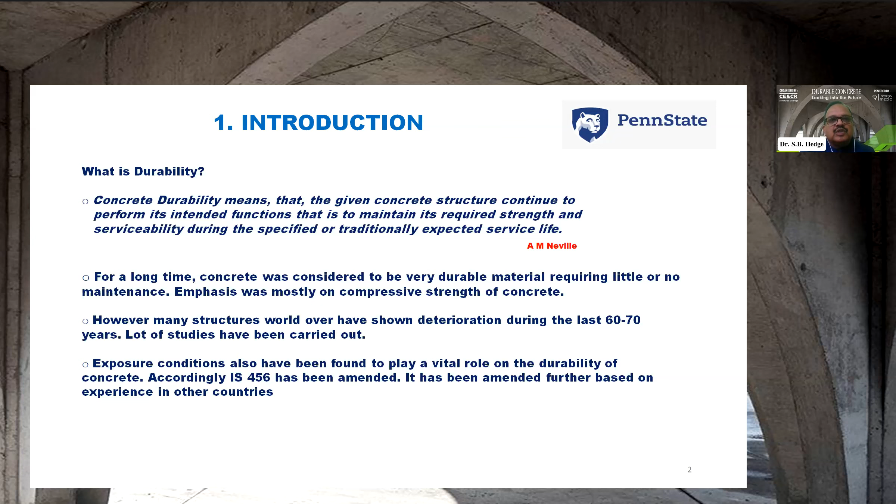I will start with some facts about durability which you may already be aware of, but for the sake of the attendees, I will just go through these slides, which are very basic in nature.

So let us consider these factors affecting the durability of concrete. The main components are the materials used in the manufacture of concrete, the method of manufacture, placing, compacting, curing, environmental conditions, loading patterns, various pollutants like carbon dioxide, and chemicals that have pervaded the environment.

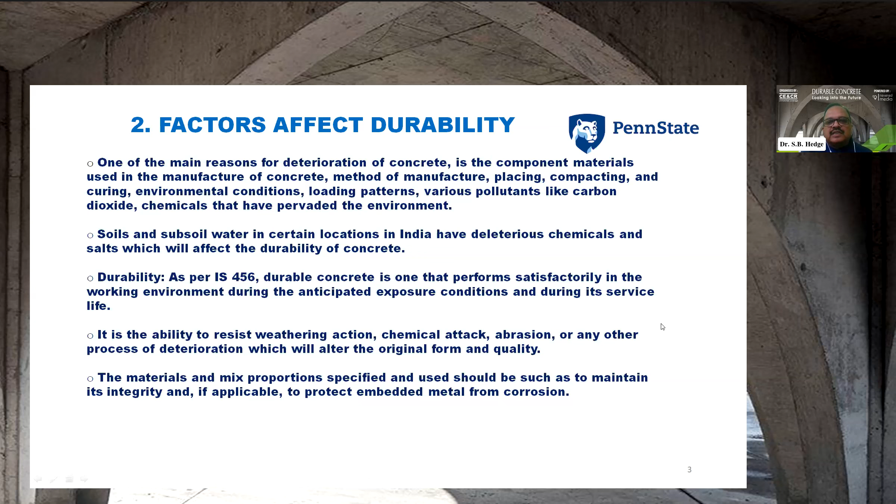So according to IS 456, durable concrete is one that performs satisfactorily in the working environment during the anticipated exposure conditions and during its service life.

Also, durability is affected by things like ingress of water, oxygen content, carbon dioxide, chloride, sulfate, and other potentially deleterious substances.

The impermeability is greatly governed because this is what is required. If the concrete is not impermeable, if it is pervious, then the deleterious components in the form of solutions of fluids enter into the concrete structure, and it will destroy the concrete.

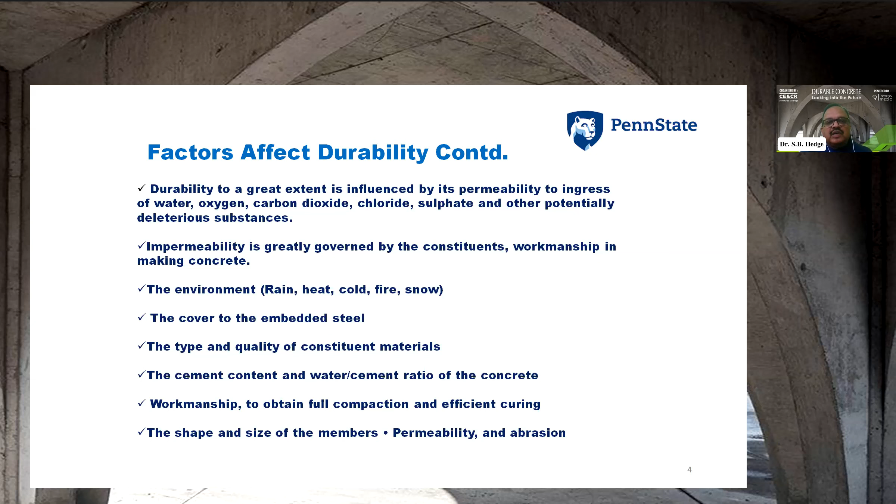Therefore, the environment like rain, heat, cold, fire, snow, the cover to the embedded steel, type and quality of constituent material, cement content - all are very important factors affecting durability.

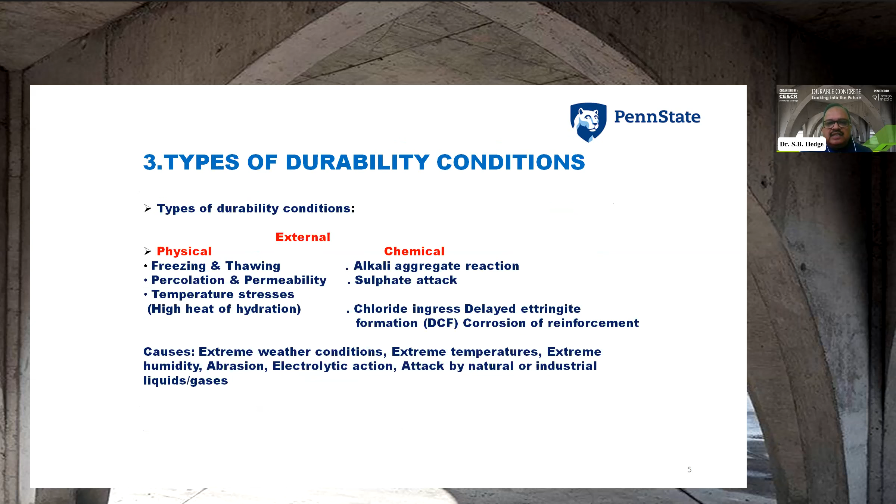If you see the different agents hampering the durability of concrete, there are two things: one is external and the other is internal. Externally, there are physical things like freezing and thawing, percolation and permeability, and chemical factors like alkali aggregate reaction, sulfate attack, chloride ingress, delayed ettringite formation, corrosion of reinforcement, etc.

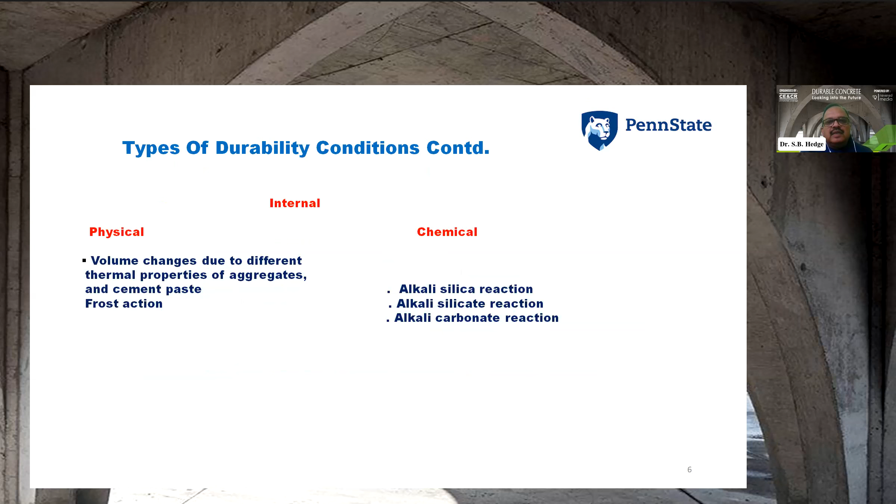Also, certain volume changes are happening. Physically, this is due to different thermal properties of aggregates and cement paste, frost action, etc. The volume expansion exerts a lot of pressure on the structure of the concrete, and it will start showing cracks. And chemically, as I mentioned, there's alkali silicate reaction, alkali carbonate reaction, etc.

If you see the environmental conditions responsible for concrete durability, there are 5 things - 5 environmental conditions have been mentioned: mild, moderate, severe, very severe, and extreme.

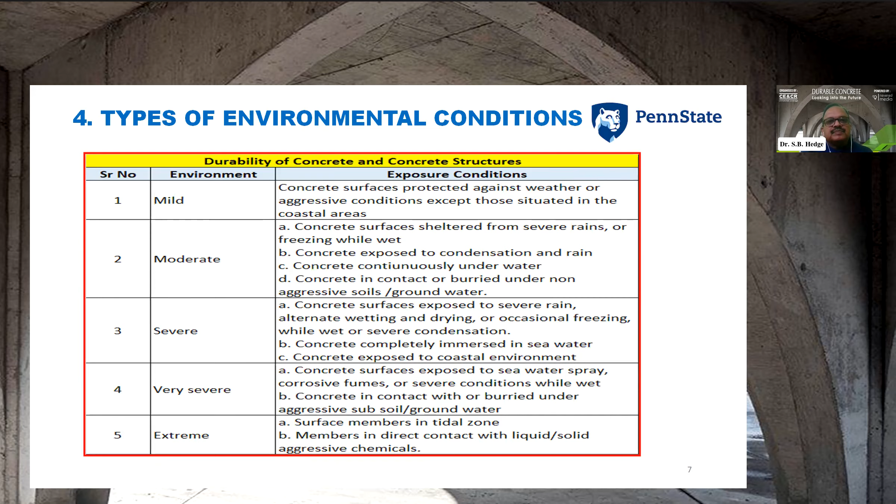When talking about general design requirements, the shape or design details shall be such that proper drainage is provided, avoiding standing pools of water, with junctions of members properly designed. Second is minimizing cracks that transmit water. Third is proper compaction and curing. Fourth, concrete is prone to deterioration due to climatic and chemical attack, especially in sections under hydrostatic pressure from one side, and partially immersed sections at corners and edges of elements. So these are certain design things to be considered.

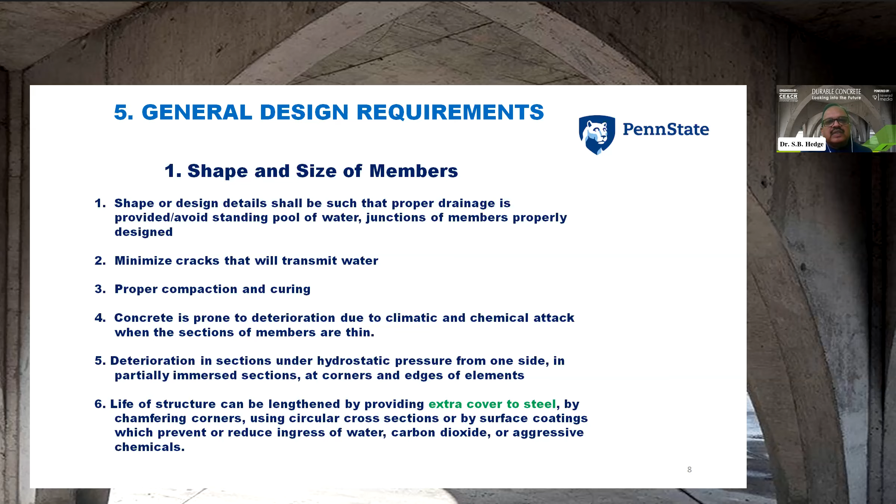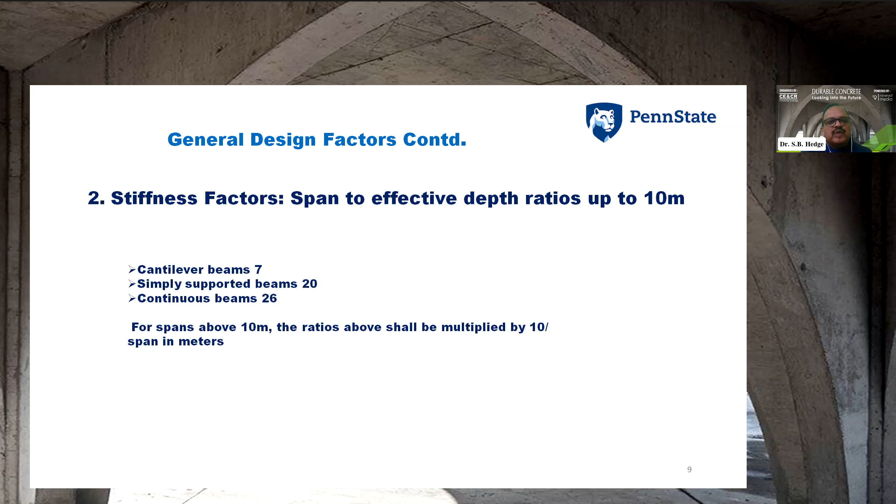Second is the stiffness factors. The span to effective depth ratios up to 10 meters: for example, cantilever beam 7, simply supported beams 20, continuous beam 26. For spans above 10 meters, the ratios above shall be multiplied by 10 divided by span in meters.

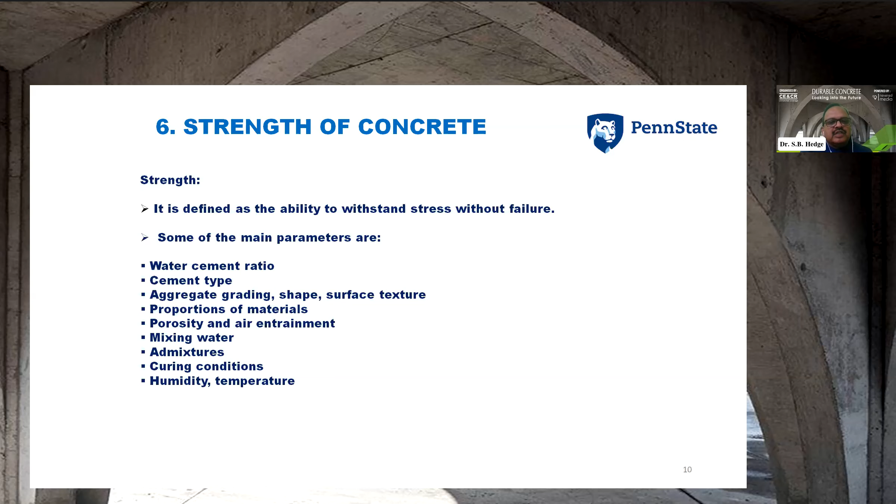What are all the factors responsible for the strength of concrete? The major things, as you are aware, water cement ratio plays a very important role. Then comes cement type, aggregate grading, shape, surface texture, proportions of materials, porosity, air entrainment, mixing water, admixtures, curing conditions, humidity, temperature - all will have a direct effect on the strength of concrete.

To give some idea about the strength of concrete, I have taken the example of M25 concrete. The permissible stresses are mentioned here: compressive stress is 6 N per mm square direct. Various permissible stresses have been mentioned: tensile stress, flexural stress, shear stress, bond stress. The strength of concrete, the grade of concrete, and the bond stress in N per mm square - everything has been mentioned. I don't want to read each and everything. I have given from M20 and M40 and above. You can see the bond stress in N per mm square.

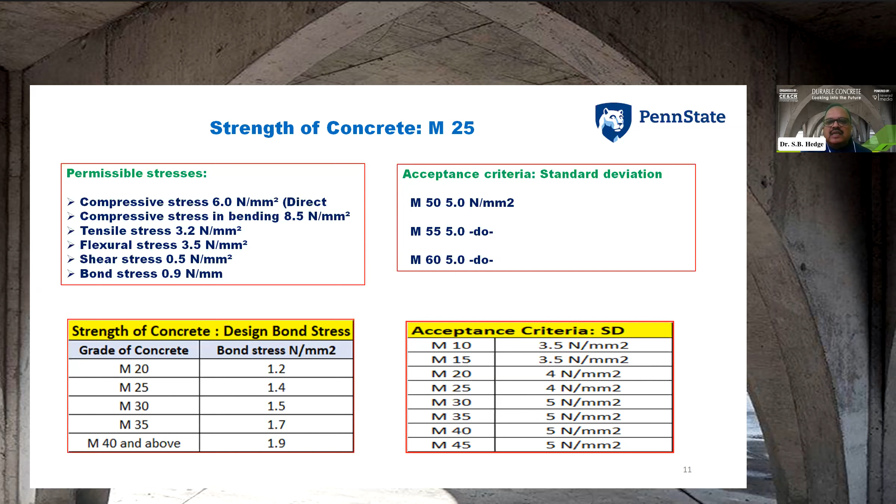And the acceptance criteria: standard deviation for M50 is 5 N mm square, M55 is 5 N mm square, and M60 is 5. The acceptance criteria as shown from M10 to M45. This is the acceptance criteria of standard deviation of the strength of concrete. You can see from the slide.

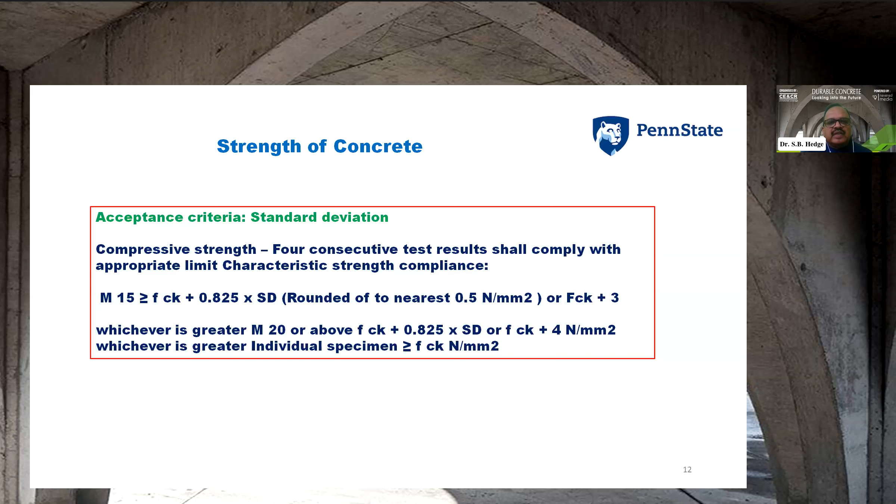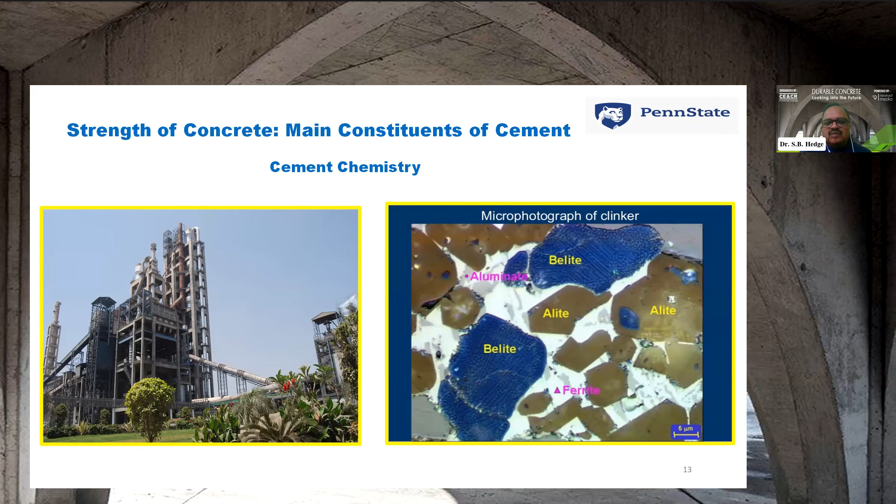The other photograph is showing the micro photograph of a clinker, a polished sample of a clinker, which shows the alite, belite, aluminate and ferrite. These four phases are responsible for the effects in the cement.

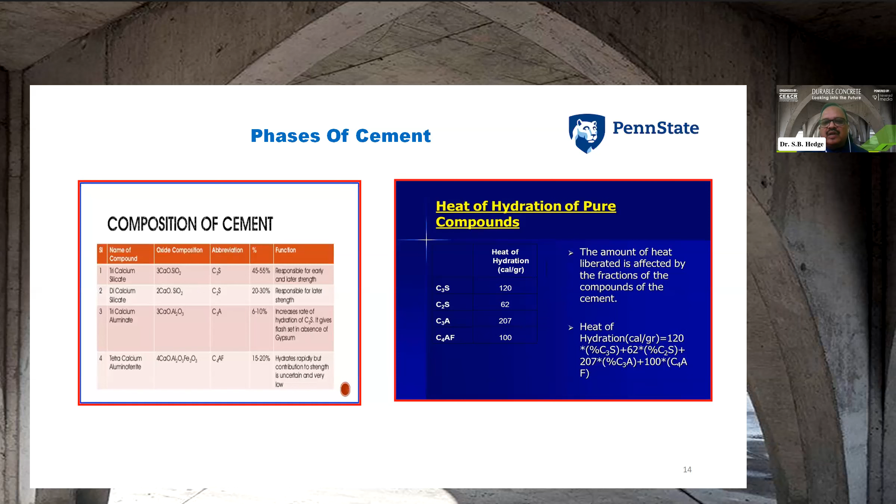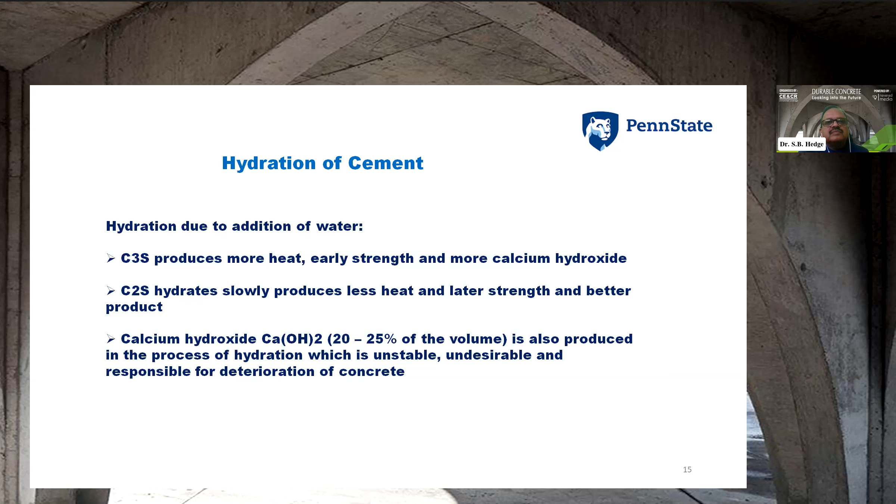If you add water into the cement, it will start hydrating, and C3S will react with water, forming CSH gel. Similarly C2S and C3A also react, as I'll show in the next slide. Calcium hydroxide also comes out of the hydration process, but it is very unstable and undesirable - more calcium hydroxide is just like high blood sugar compared to the human body, so for cement, high calcium hydroxide is just like diabetes. The hydration reactions shown: C3A reacts with water giving ettringite, and C3A once again reacts with what is leftover, forming monosulfoaluminate, while C3S and C2S give CSH gel, which is responsible for strength generation. This is the reaction of hydration.

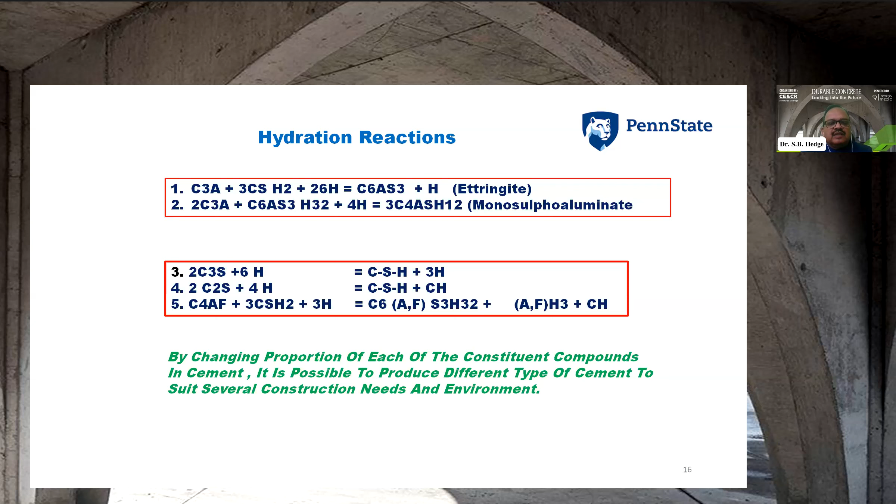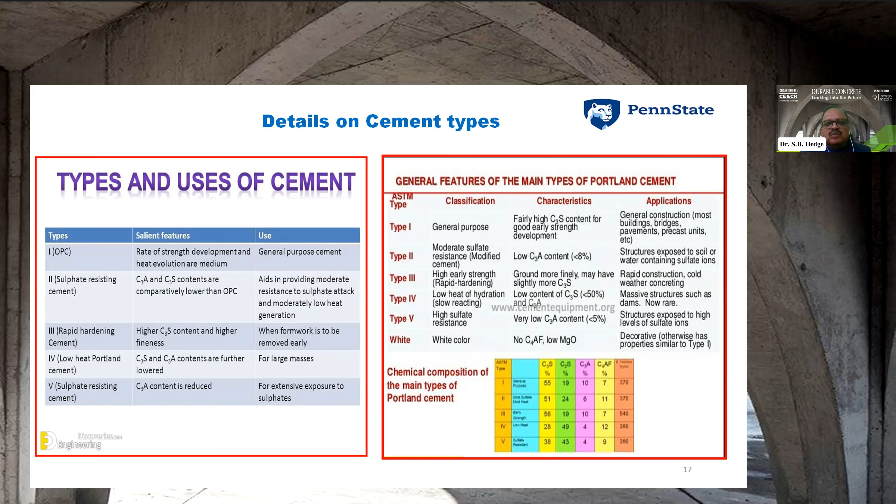The codal provisions, if you look at it, the standard codes of all the construction practices are SP62, CPWD standard specifications, IS 456, NBC 2005. These codals are available for reference.

And if you see the next slide, the minimum cement content and maximum water cement ratio for RCC are shown for 4 different environmental conditions: mild, moderate, severe, extreme. What should be the cement content and water cement ratio for each grade of concrete, everything has been shown.

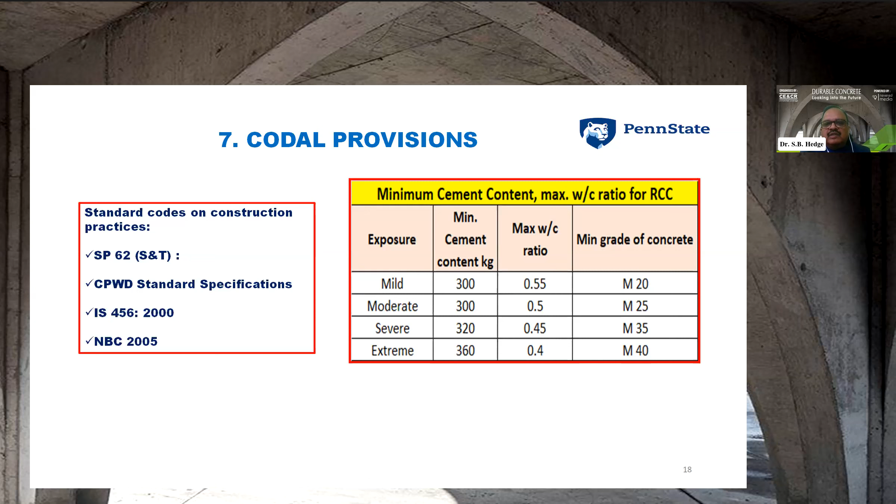And the type of cement, which I mentioned, in India I think there is only OPC IS 269 available, and then PPC IS 1489, sulfate resisting cement, rapid hardening cement, even PSC, everything is available. But there is no such category like 43, 33 or 53 that has been clubbed into IS 269.

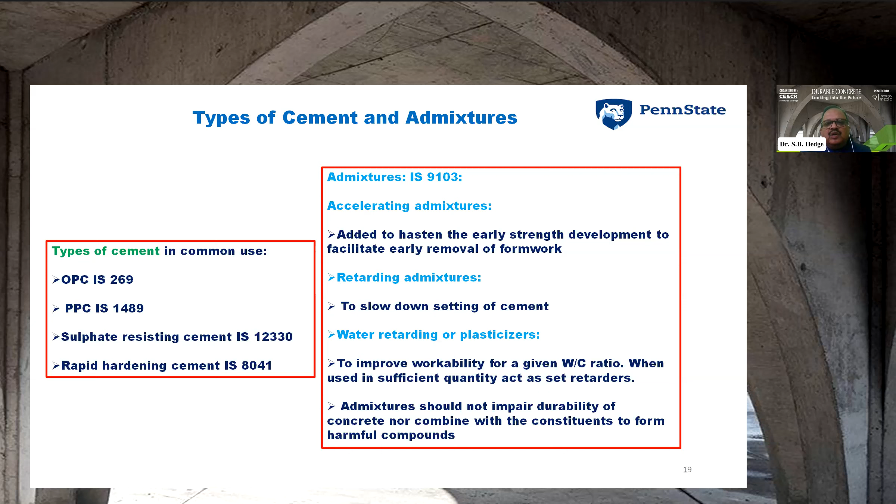And this is the specification for admixtures. You can see the different types of admixtures for retardation and for reduction of water. Depending upon the water reduction, it is classed as plasticizers and super plasticizers.

And also among the admixtures, air entraining admixtures or air entraining agents are coming, which is a very important thing. These improve the durability, water tightness, and workability, etc.

So it's very important. And if you see the other table, the slump required for different placing conditions - blinding concrete, shallow sections, mass concreting, heavy reinforcement, slipform work, etc. - and the degree of workability is also mentioned, along with what should be the slump and compacting factor.

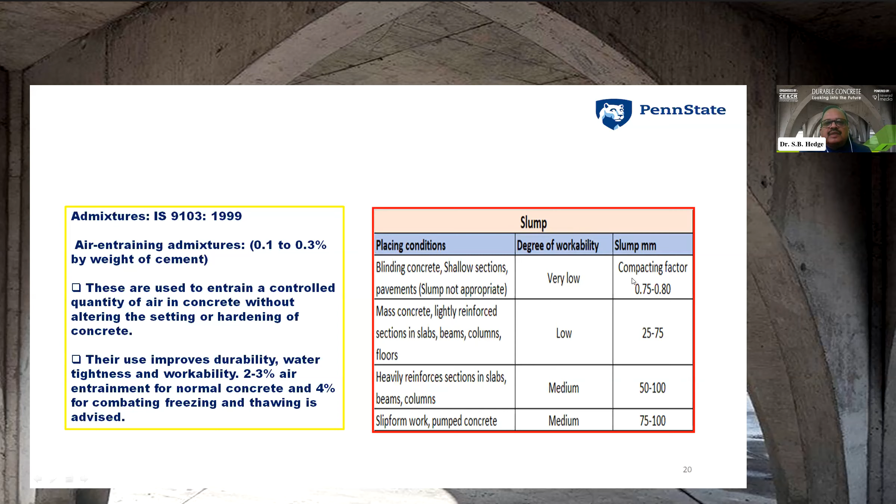Second, we will go to chemical action on concrete. If you look at this table, there are different concentrations of SO3 shown at 5 different situations, and the required minimum cement content has been mentioned with maximum water cement ratio, and what type of cement is to be used has also been tabulated, you can see by yourself.

Another table talks about the chloride content, the type of concrete, and the maximum chloride per kg per cubic meter shown here. Similarly, for water used in concrete - organic, inorganic sulfates and chlorides for PCC - the permissible limit as per IS has been mentioned for your reference, the permissible limit of water.

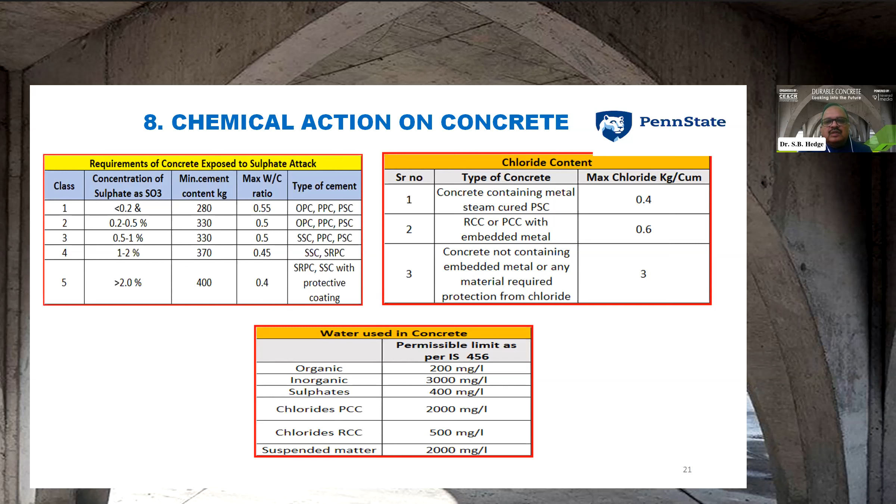The next important thing is that durability is also governed by soils and water, because a majority of soils contain sulfates and other deleterious components which come directly in contact with the concrete and are responsible for sulfate attack, which goes into the structure of the concrete, and the sulfate attack begins.

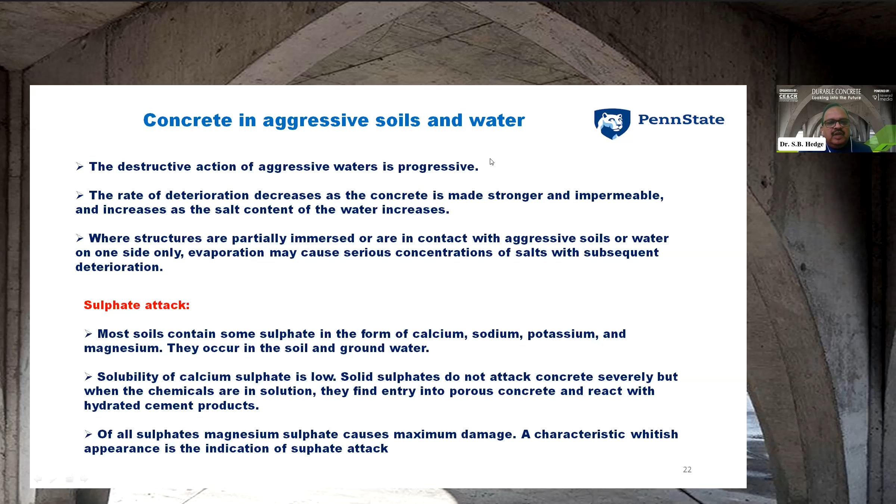And magnesium sulfate is also very, very important for durability of concrete, just like sulfate attack. The magnesium sulfate I mentioned reacts not only with calcium hydroxide and hydrated calcium aluminates, but also decomposes hydrated calcium silicates completely. You can see white patches if it is attacked by magnesium sulfates.

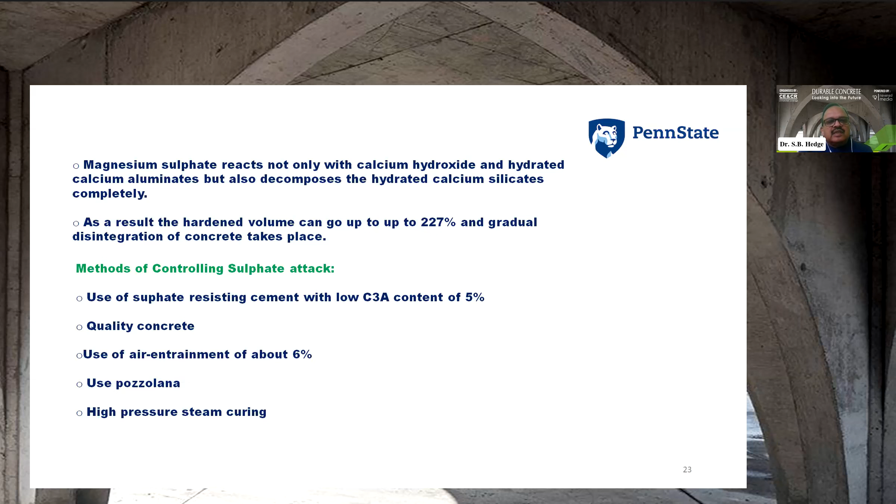So how to control this sulfate attack? The use of sulfate resisting cement with low C3A content is one option. Then the quality of concrete should be good. You have to use air entraining agents and use pozzolanic materials or cementitious materials. These are certain options available for making it durable.

The structure, because the water also contains a lot of TDS. If TDS is very high, once the water is evaporated, there will be an incrustation of salts, which is responsible for the disintegration or durability issues of the concrete in that region.

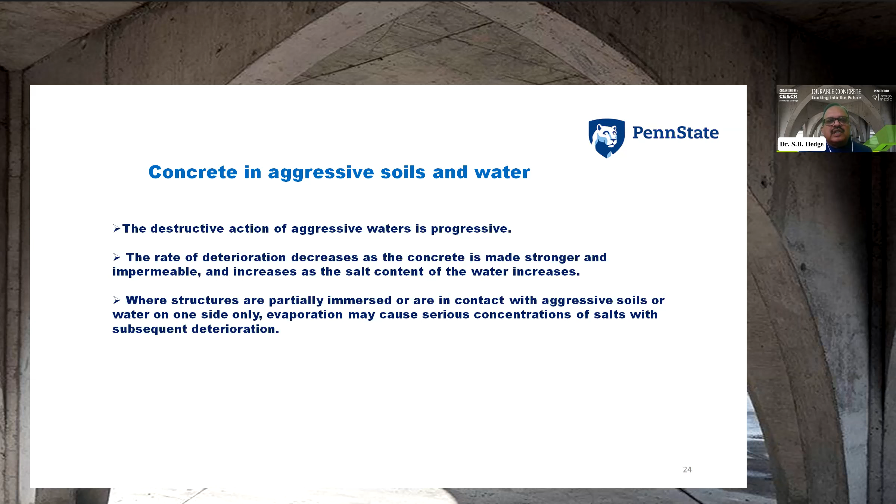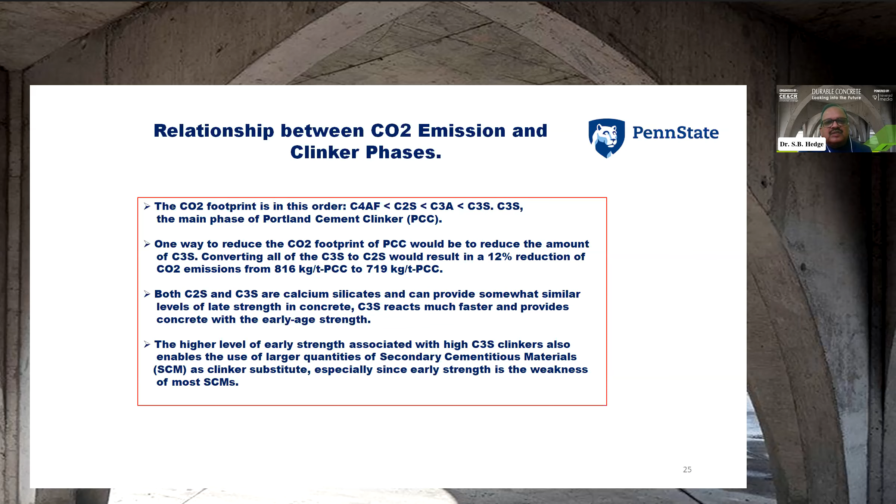So now we are talking about the durability to enhance concrete sustainability, because this is the route, this is how we have to go. It should go hand in hand, because we cannot do the work only on sustainability or only on durability, and both the things are to be looked into—we cannot do it in isolation. As you all know, the sustainability of concrete buildings and infrastructure must be considered, both in terms of its benefit to society and the environment, and the impact associated with its use in construction.

As you are aware, concrete is a very cheap material, and therefore it has gained a lot of importance in construction. Similarly, the durability performance of construction materials is important. Concrete is often considered to be inherently durable due to chemical and physical resistance to various environments and dimensional stability.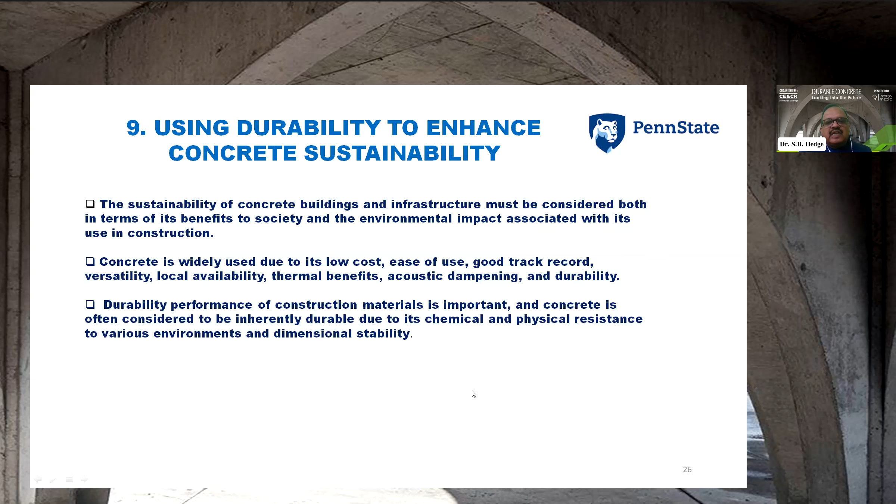And of late, cement and concrete making are also incorporating a lot of waste material into the system, to talk about sustainability initiatives or the circular concept, circular economy. Waste utilization, as I mentioned, has started now—for example, waste oils and other combustible materials.

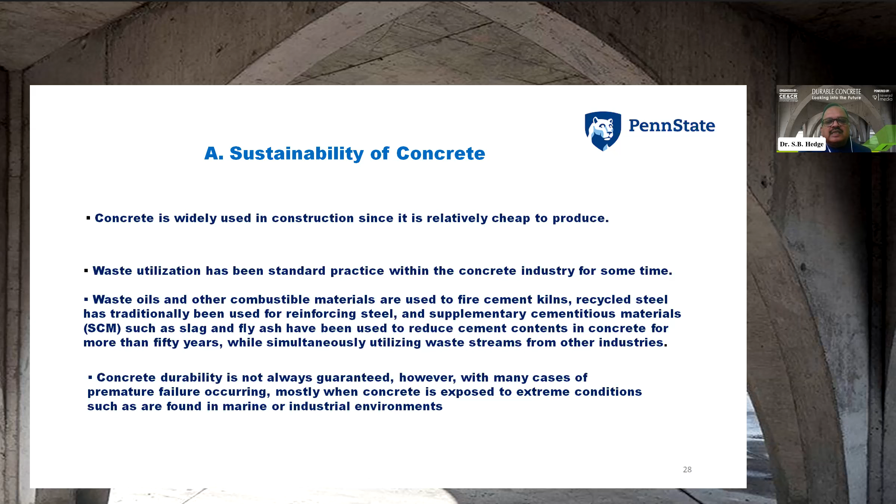We started because cement and concrete are going hand in hand, since cement is not the end product—the end product is the concrete. So what is required is how much CO2 is coming out from cement making or concrete, that is important. Therefore, it is very, very important to use sustainability initiatives in cement plants. Cement plants are using a lot of various alternate fuels—wastes from the municipality, plastics, tires, etc. Similarly, these things have started in concrete making also, which I will discuss in the next slide.

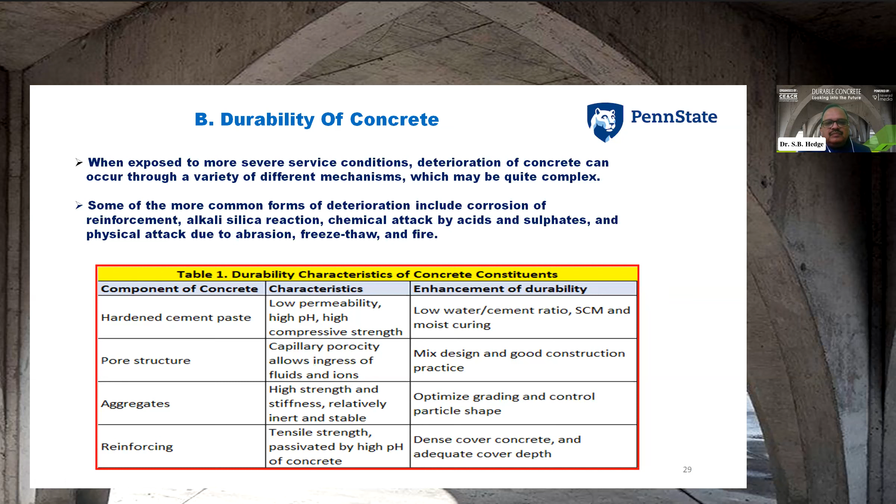So this particular slide shows how to mitigate concrete deterioration in order to attain a sustainable approach. Various deterioration issues occur—for example, corrosion of rebar, alkali silica reaction, physical attack and abrasion, sewer pipe corrosion, etc.

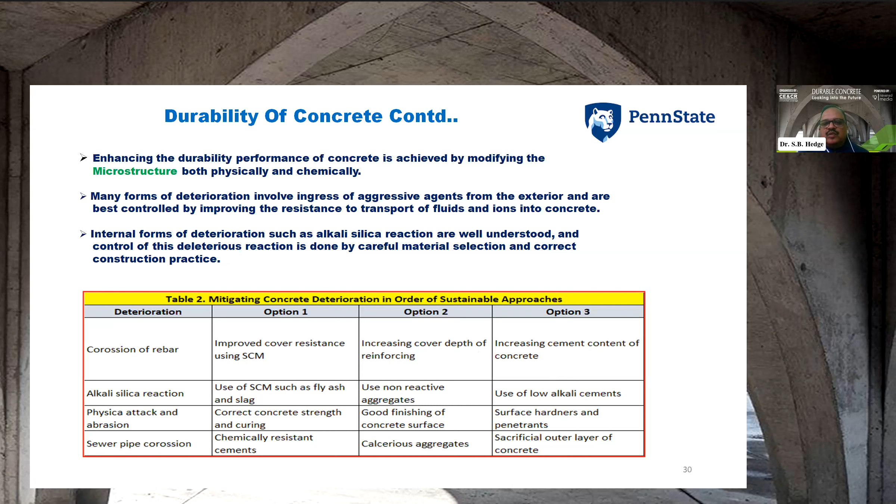The three options which I mention here: improved cover resistance using SCM such as fly ash, correct concrete strength and curing. Option 2: increasing cover depth of reinforcing, use of non-reactive aggregates, good finishing of concrete surface. Option 3: increasing cement content of concrete, use of low alkali cements, surface hardeners and penetrants, etc.

So now we are talking about improved service life. As you are all aware, buildings or structures have been designed for 30 to 50 years. If you can double the service life of structures, maybe to 100 to 150 years, it does not require a significant increase in construction resources. In many cases, the extra requirement involves only a slight adjustment in the concrete resistance or cover depth to the embedded reinforcement. By this, we can improve the service life of the concrete, of the structure.

The cover concrete that surrounds the reinforcing steel provides protection from environmental agents such as moisture and salt that cause corrosion. One example I've given is a bridge in New Zealand, and the table shows the PC percentage mentioned from 100 to 50%, then SCM percentage, then 40mm cover and 60mm cover. You can see the effect of this.

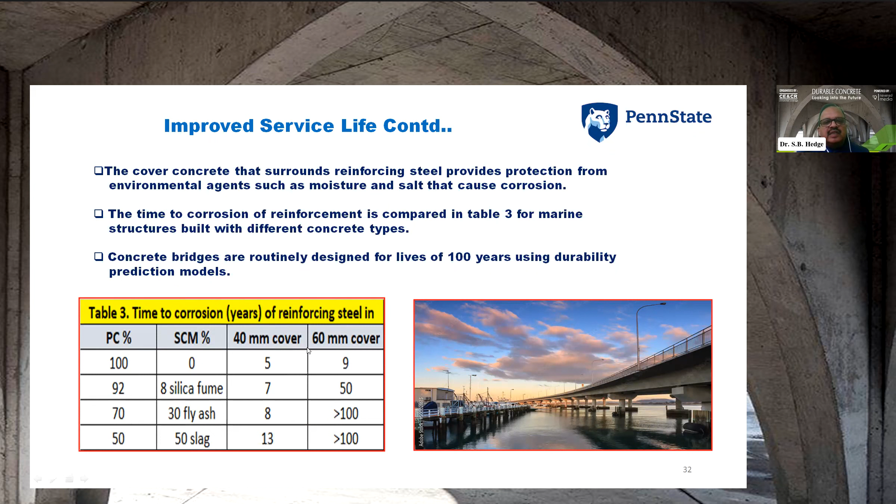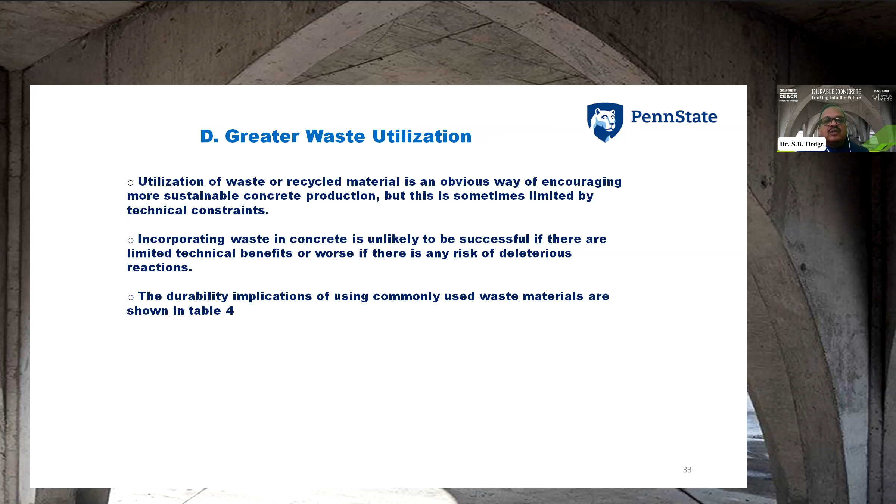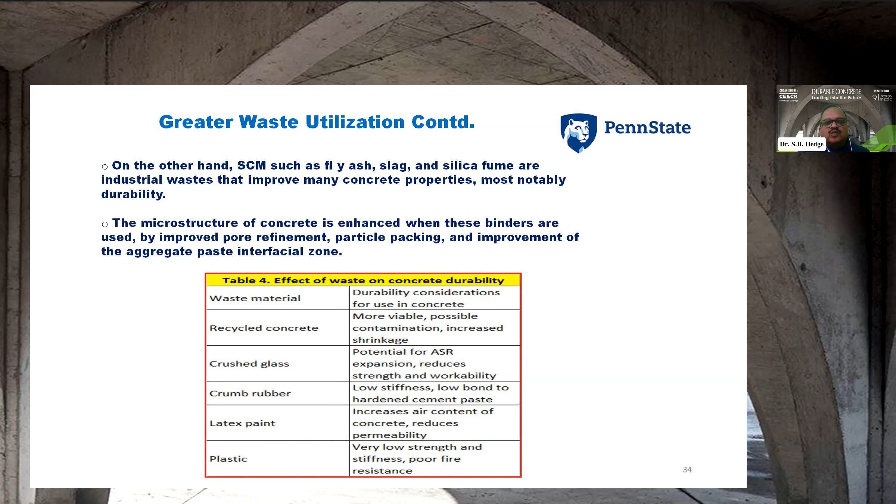Then there is greater utilization of wastes in concrete, which I already mentioned. Various materials have been used—waste materials like recycled concrete, crushed glass, crumb rubber, latex paint, etc. But you can see the effect of that: durability considerations, more viable, possible contamination, increased shrinkage. So durability may increase or it may be hampered also by using these waste materials—we have to keep that in mind and make a sort of optimization of what should be the level of addition of these materials, so that durability should not be hampered. At the same time, these materials are also being used, so we have to have a balance of that.

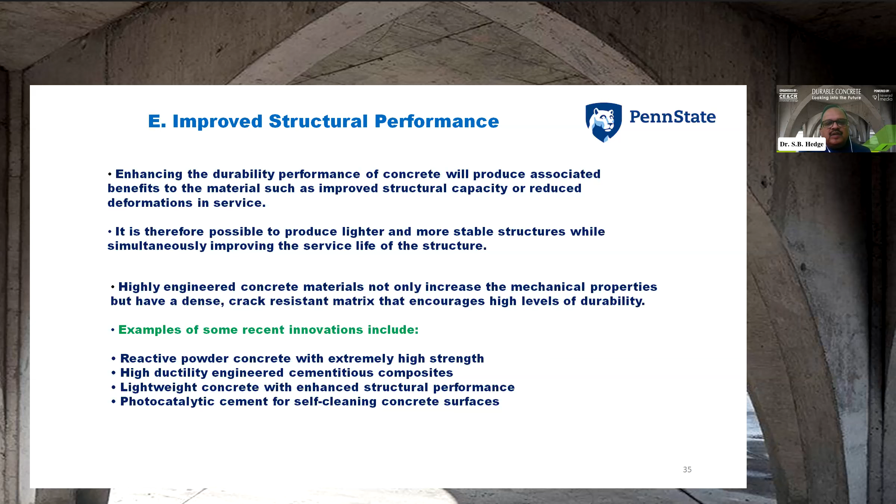So the next point is improved structural performance, which is obviously a very important thing to improve the service life of the concrete, which I already mentioned. Some examples of recent innovation which I included: reactive powder concrete with extremely high strength, high ductility engineered cementitious composites, lightweight concrete with enhanced structural performance, photocatalytic cement for self-cleaning concrete surfaces, etc.

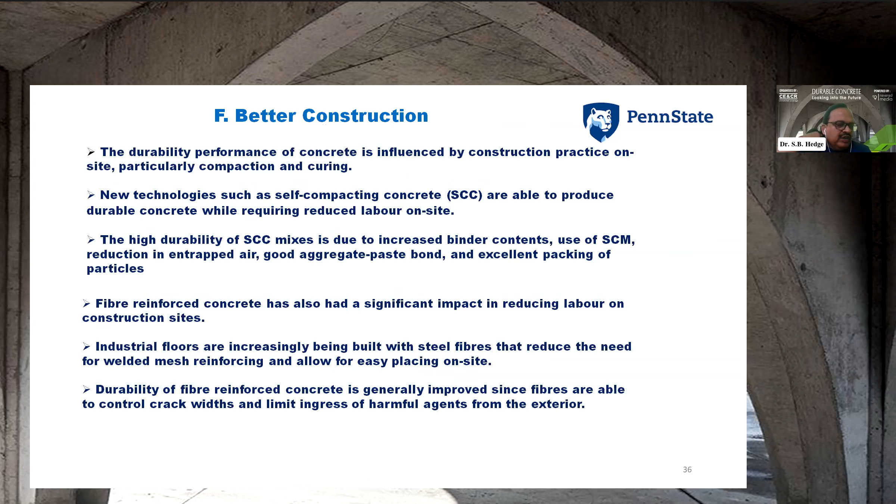So for better construction, I think now new types of concrete have come out, like self-compacting concrete, fiber reinforced concrete, etc. These have come into the picture, or we can say some special concretes.

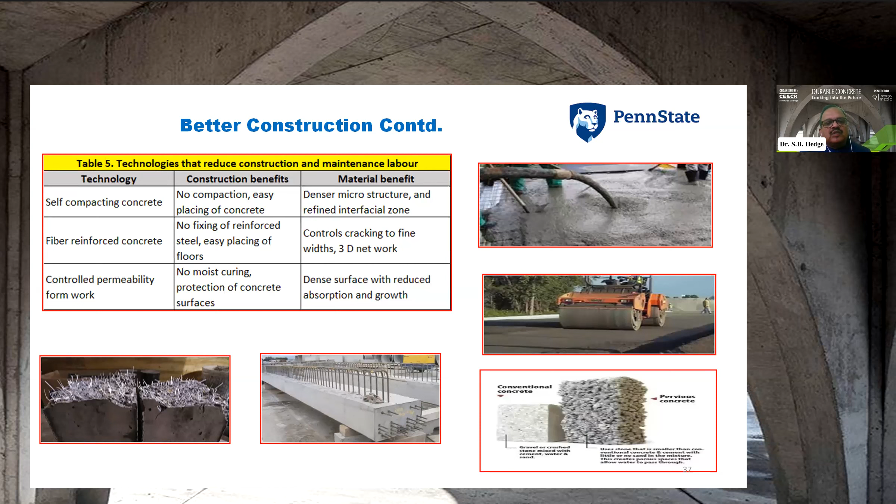In this table, you can see self-compacting concrete, fiber reinforced concrete, controlled permeability formwork, the construction benefits, material benefits, and the advantages of using this type of concrete have all been mentioned.

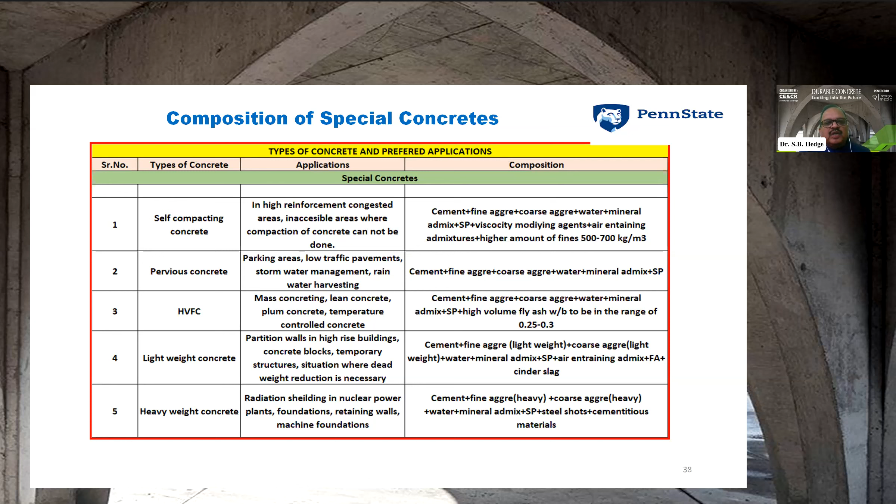This particular table shows the various new generation concretes, or special concretes. You can see where it is being used, the composition of this concrete, the ingredients, etc., have been detailed. I have tabulated around 10 special concretes that you can see from this table.

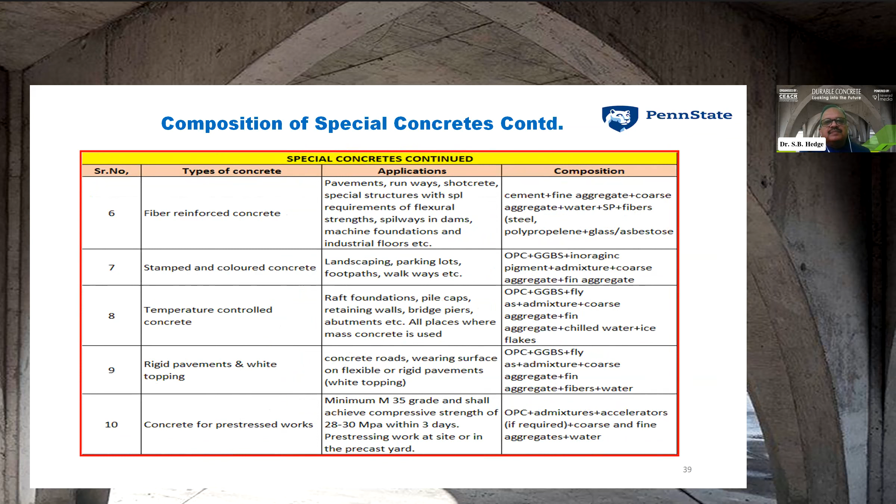In fact, I would like to mention here that we have taken up a project on waste glass as a pozzolana in Penn State University for MS students.

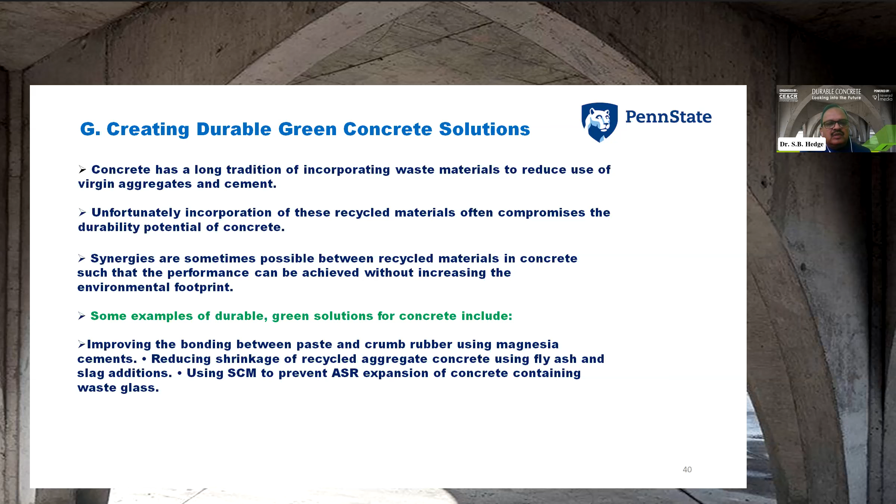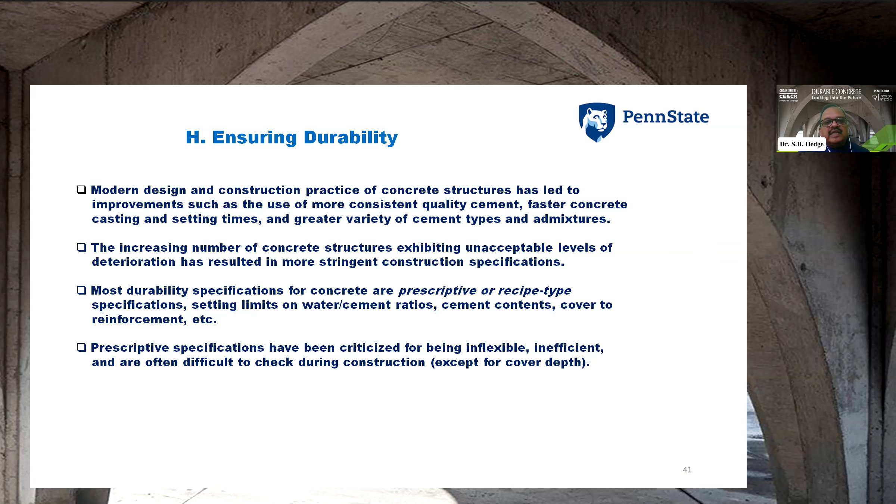Now it is very important to ensure durability. Various things have been mentioned here, but because of lack of time I don't want to discuss them all; you can see it from the slide. The specification is prescriptive or recipe type. Sometimes specifications are the hurdles, like prescriptive specifications. What are all the limitations, what are all the hurdles in it, everything I have mentioned here in the durability slide.

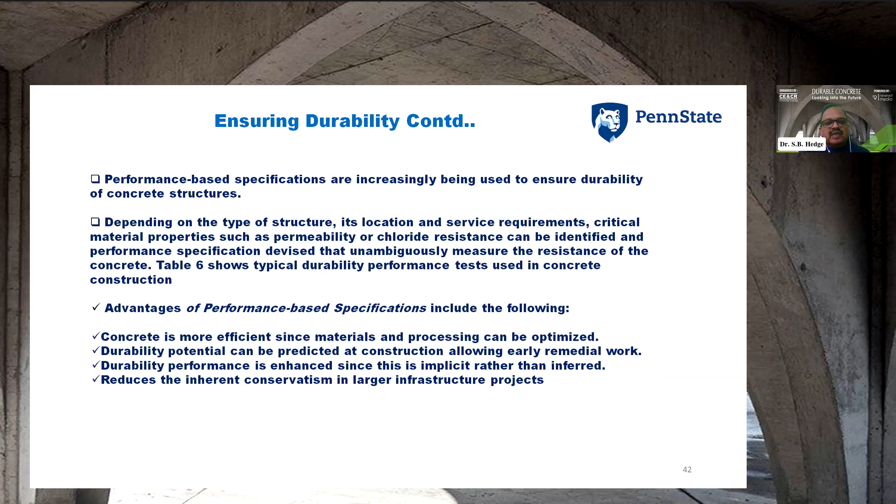Concrete is more efficient since materials processing can be optimized. Durability potential can be predicted at construction, allowing early remedial work. Durability performance is enhanced since this is implicit rather than inferred. It reduces the inherent conservatism in larger infrastructure projects, etc.

In this particular slide, you can see the durability performance tests for concrete: chloride, carbonation resistance, water absorption, etc. What are all the measured parameters, and what is the intended benefit for each, has also been mentioned in this table.

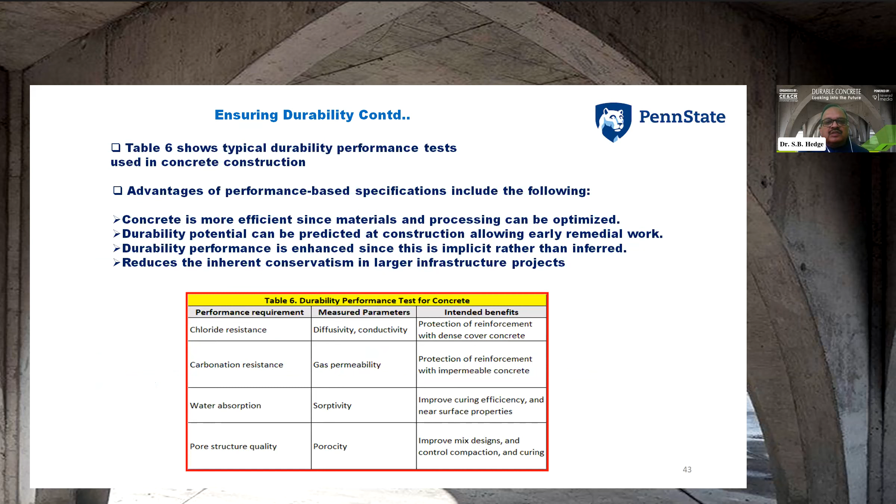And I have put forth some thoughts on the future outlook of concrete durability. If you see point number 1: the philosophy of high strength concrete—is it durable and sustainable?

As I mentioned here, the world is passing through difficult and troubled times as we live in a rapidly changing world. The construction industry is facing many challenges: global warming, climate change factors, and the capability to achieve sustainable development and economic progress without damaging our environment.

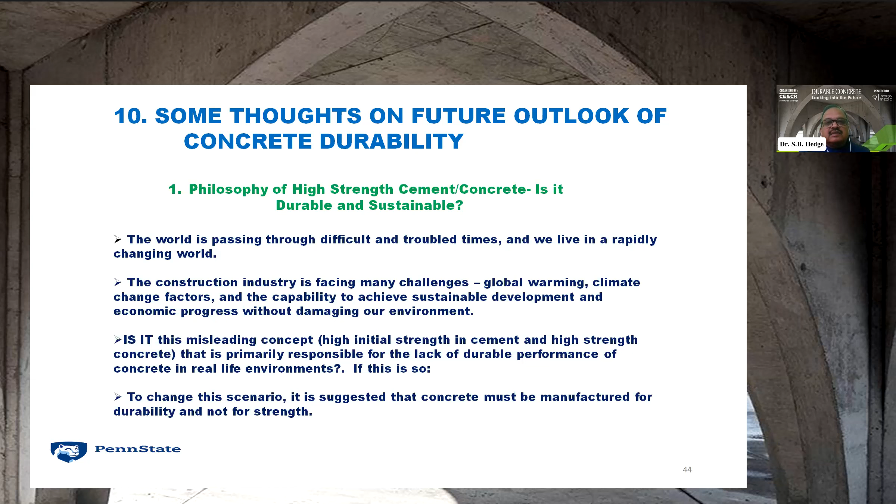So is this a misleading concept? I'm just asking a question: is asking for high initial strength in cement, high strength concrete, primarily responsible for the lack of durable performance of concrete in real life environments? If this is so, to change this scenario, it is suggested that concrete must be manufactured for durability, not for strength. These are some of my ideas I have put before you for this deliberation.

And the philosophy of holistic durability design policy—what is this? It is an integrated material and structural design strategy where strength through durability is the need of the hour rather than strength alone, and structures are designed for ductility and structural integrity.

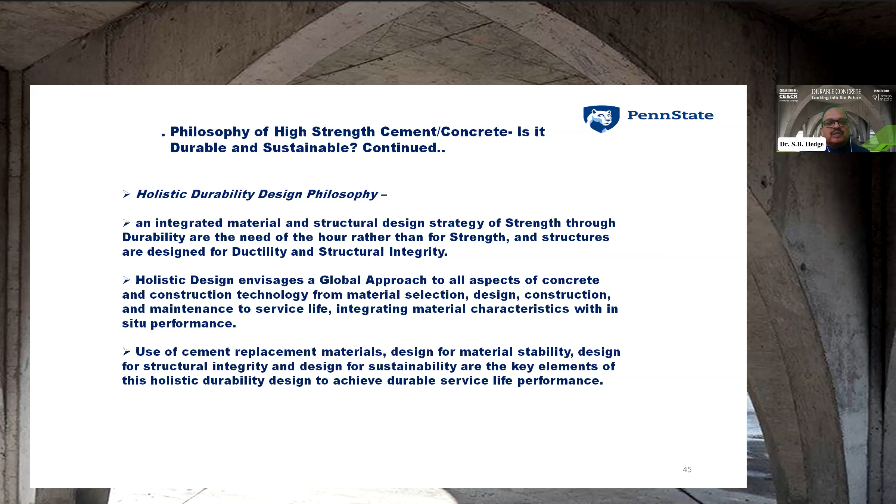The holistic design envisages a global approach to all aspects of concrete and construction technology, from material selection, design, construction, and maintenance to service life, integrating material characteristics with in-situ performance. Use of cement replacement materials, design of material stability, design of structural integrity, and design for sustainability are the key elements of this holistic durability design to achieve durable service life performance.

Second, which I mentioned, is the training of construction workers. I don't want to dwell upon that, but this is the need of the hour. I think CIDC is doing good work in other parts of India, but what I mean to say is that some sort of academic degrees or diplomas can be taught for the skill development program.

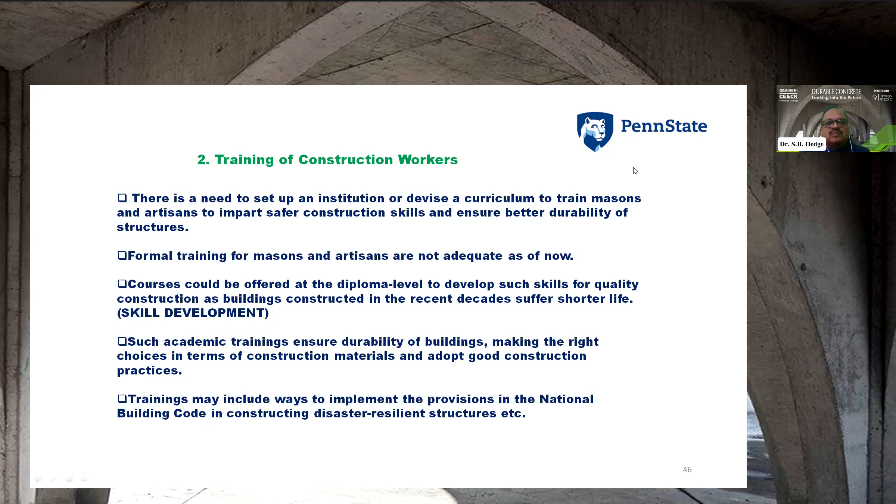I think if you go to the websites of skill development of the Government of India or any state government, you can see one department for skill development, and various courses mentioned there. We have to take advantage of that. Third is the performance-based approach of concrete durability, which I already mentioned.

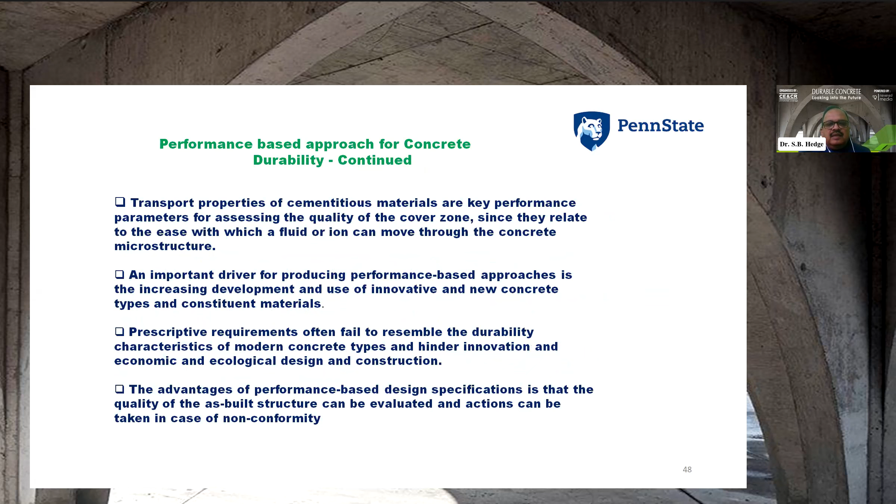Then the performance-based approach will continue, like the prescriptive requirements I already mentioned, such as cover zone etc. What is the advantage of performance-based design specifications has been mentioned.

There are some shortcomings if you focus only on the characteristic of raw material, mix proportion, batching, mixing, transport of fresh concrete, and range of construction operations from placing to curing. We have to focus on that very keenly.

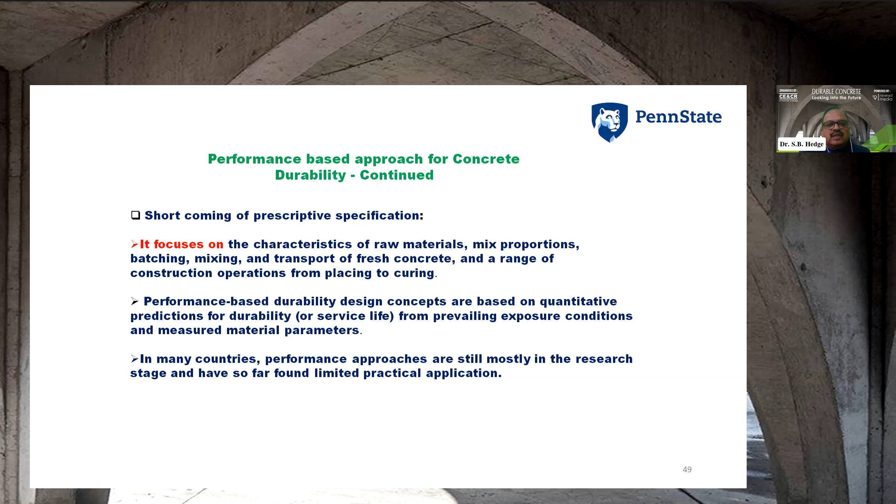Performance-based durability design concepts are based on quantitative predictions for durability or service life from prevailing exposure conditions and measured material parameters. In many countries, the performance approaches are still mostly in the research stage and have so far found limited practical application.

This is about the futuristic thing for future research and development needs. The second point is a suitable approach for all stages, from initial mix design process to quality control and conformity assessment of in situ concrete, has been restricted to individual countries. South Africa and Switzerland are showing the most advanced progress at this stage.

The third one is where the game changer is: more research on commercialization is needed for carbon negative concrete. This is the need of the hour and would be a game changer for a sustainable future.

So to come to the conclusion, the need for reliable performance approaches relates to shortcomings of the traditionally prescriptive design methods for concrete durability. These methods, usually based on selecting a limited combination of mix parameters for a range of environmental exposure conditions, largely fail to account for the influence of constituent materials and cannot account for influence of construction procedures.

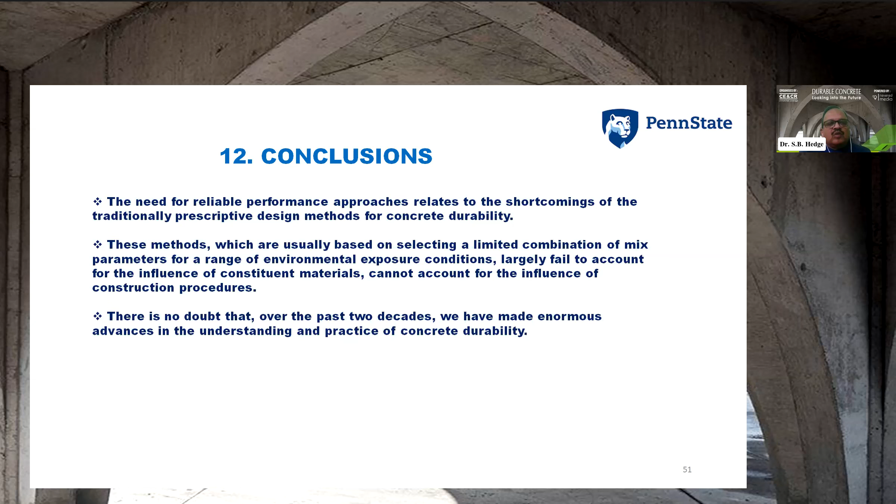There is no doubt that over the past two decades we have made enormous advances in the understanding and practice of concrete durability. Durability design is beginning to be considered of equal importance as design for safety and serviceability. Nevertheless, durability concerns remain, and early deterioration still attracts much expenditure.

Based on current design practice and current knowledge, future research and development needs would include the influence of constituent materials, deterioration prevention methods, service life modeling of reinforced concrete structures, and performance-based test methods. The key durability challenge lies in predicting the performance of new materials, where the increasing diversity of cement and concrete plays a major role.

As most current engineering models are not capable of predicting actual field performance adequately, a knowledge-based approach to durability will become more important than ever. Only a scientific approach on a multi-scale, interdisciplinary level will allow predicting performance of new materials. This will facilitate the use of more performance-based durability design, which is urgently needed to promote innovative, long-lasting solutions.

So thank you very much for the patient hearing. Thank you.